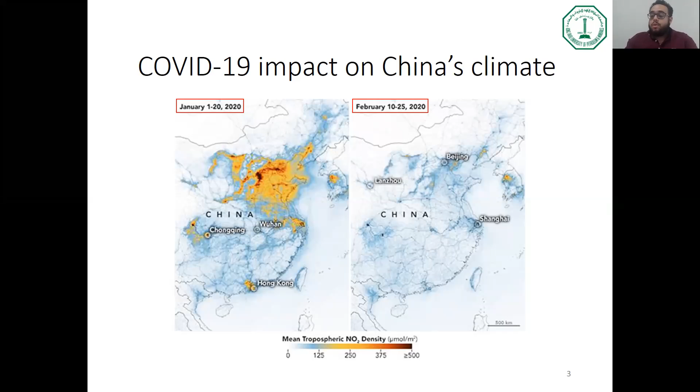If just one month of an effect did such a huge and significant positive impact on the climate, environmentalists would argue that the solution to save our environment from the global warming disaster is basically to use renewable energy.

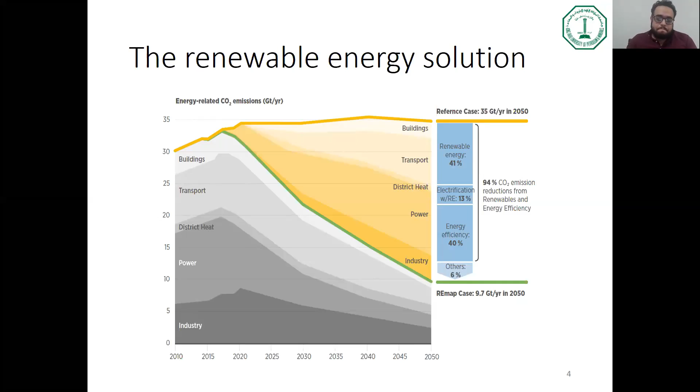So basically we can replace around 25 gigatons per year of CO2 just by converting everything to renewable energy, which is good and correct, no doubt. The problem is that energy transitions always require a lot of investment and a lot of money.

So it's way easier to just go with the oil flow. It's very easy to give statistics about how fossil fuels are horrible and how they damage the environment, and that we need to act against that, and everyone knows this. The problem is that our financial budgets are different than our environmental budgets.

We know that we need to act in 20 to 30 years to solve the global warming problem. The problem is we don't have the money needed, or no one is motivated to invest billions and billions of dollars in just a few years to save the environment. This is not enough business motivation, unfortunately.

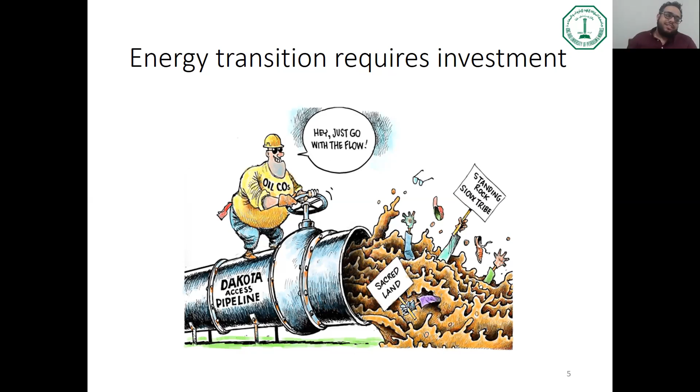So a lot of countries would just prefer going with the flow and keeping things as they are. CO2 emissions is not a good motivation, unfortunately. So how about we look at the problem from a different perspective? Maybe that would provide another motivation for people to act immediately and start the transition to renewable energy.

Let's take the case of Saudi Arabia, and consider the case of Aramco. Interestingly, Aramco published last year, for the sake of their IPO project, an approximation of Saudi Arabia's oil reserves. In their official IPO report, they reported the oil reserves and the biggest oil fields in Saudi Arabia, including Ghawar, which is the biggest onshore oil field, Khurais, Shaiba, and others.

So basically, when Aramco summed up their approximate oil reserves, they found out that Saudi Arabia has around 256 billion barrels of oil reserved under the ground in total.

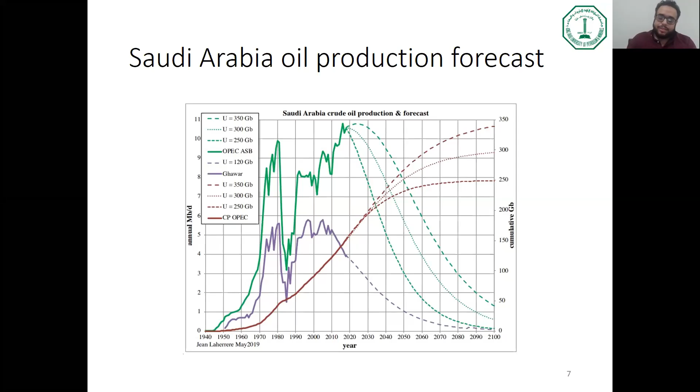COVID-19 actually taught us a very basic but important lesson in economics. You remember in April and March, the West Texas Intermediate oil price went down to around minus $40 per barrel. This means that you buy a barrel and the company will give you $40 above that, for free, just to remove this crude oil barrel. No one wanted this crude oil barrel, okay? The price sunk down to minus $40.

What this tells us is that it doesn't matter how much crude oil you have reserved if there was no demand. Supply makes sense and is important only if there is demand. If there is no demand, then your supply is useless, worthless actually.

Based on this, let's look at how the oil and energy demand will be in the coming 10 years, which is nothing in a nation's history.

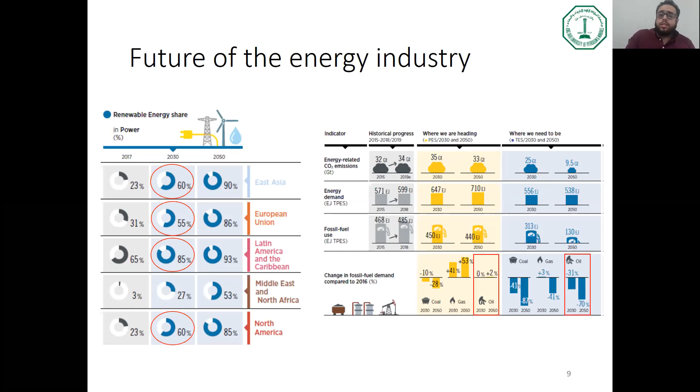And this is actually partly why the government in Saudi Arabia decided to start up NEOM. The whole idea about NEOM, or part of NEOM's idea, is basically to build a 100% renewable energy system that would produce green hydrogen. We'll discuss later what green hydrogen would do for you. Basically, the term green hydrogen means that this hydrogen is produced from renewable energy, so you would use renewable energy to power and electrify your cities and industry, as well as to produce hydrogen.

Not only that, already 3 years ago, the government, as part of Vision 2030, started up what's called the National Renewable Energy Program. Its role is to oversee all renewable energy projects in Saudi Arabia, and its main goal is to produce 10% of the kingdom's energy consumption through renewable energy in 10 years. So 10% in 10 years.

This includes several projects that already started and will start, like Al Khafji Solar Desalination Power Plant, the largest solar desalination power plant in the world. Skaka Solar Power Plant in Al Jawf is already operating and produces 300 megawatts of electricity from solar. Domat Al Jandal Wind Farm will start in 2022, surprisingly funded by Saudi Aramco, and it will produce 400 megawatts of renewable energy.

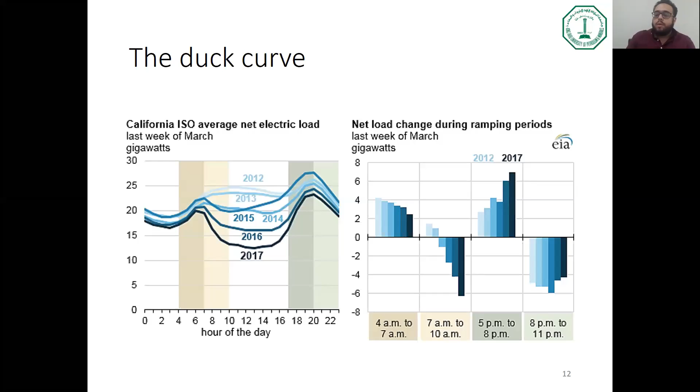So if such a problem happens when we use renewable energy, what do we do? The solution to this problem is to use what's called energy storage.

The concept behind energy storage is simple: you store your excess energy at night, when everyone is sleeping and no one is using a lot of electricity, in some form. Then in the late afternoon or early night, when the demand for natural gas jumps, you release whatever energy you stored. We're not talking yet about how to store energy, just saying that if such a technology exists, it would be very helpful to solve the duck curve problem, which will always happen whether you are in California or in Saudi Arabia.

So you store the excess electricity at night, late at night when everyone's sleeping, and you release it early at Maghrib, early night, when the demand for natural gas jumps rapidly. This is the idea of energy storage.

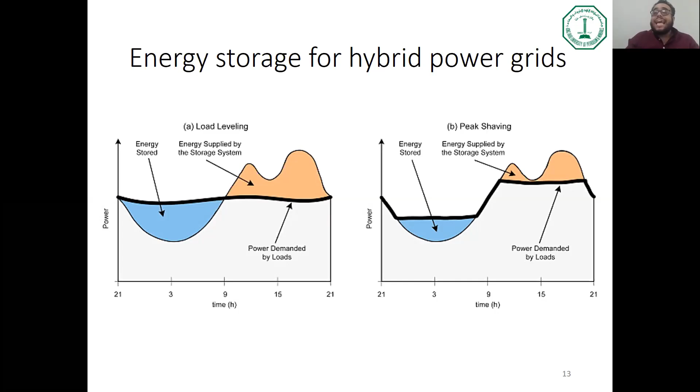What we are hoping for after installing solar panels and energy storage technologies, and integrating this with our natural gas main grid, is to reach something called a smart hybrid power grid. In your smart grid, you would depend big time on renewable energy resources like wind energy, solar energy, nuclear energy, and so on, in addition to your energy storage technology.

All of that would be connected through a smart, artificially intelligent system that depends on the Internet of Things. That central intelligent system would predict how much demand there is for power and electricity across the day, using smart meters found in our smart homes, smart buildings, and smart industries, which send data to the center saying, today we need 30 megawatts of electricity.

That artificially intelligent center would transmit this data back to our renewable energy power plants, so they would produce as much electricity as needed and send it back to you. It's really a two-way dialogue system where you tell us how much electricity you need, and we also predict how much you'll need based on your history.

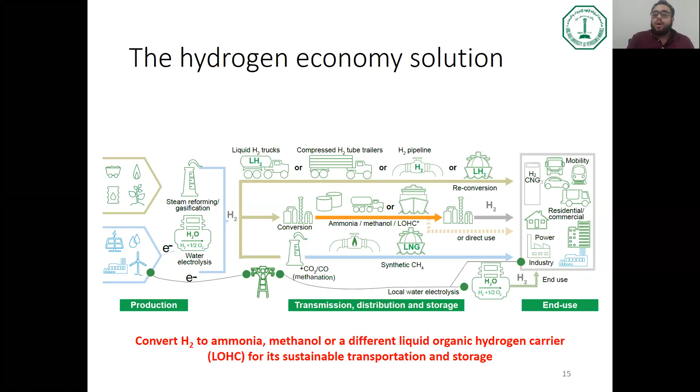So now you would wonder, how expensive is it to produce hydrogen from renewable energy? Actually, if you would have asked me this question 5 years ago, I would have told you extremely expensive. Only 5 years ago, the cost of producing hydrogen from renewable energy was around 9 to 10 euros per kilogram of hydrogen. This is extremely expensive.

Just in 5 years, the cost of producing hydrogen dropped by 45%. The expectation is that by 2030, the cost of hydrogen production will drop by another 50%. So really, by 2030 it's going to be around 2 euros per kilogram of hydrogen, and this is so cheap. So with time, it wouldn't be that expensive actually to produce hydrogen from renewable energy. So this is one good point.

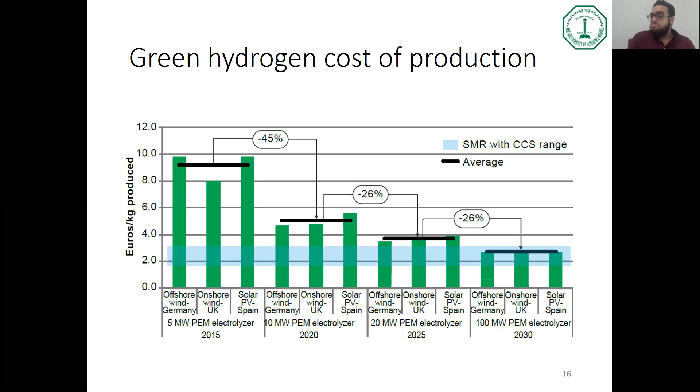The other good point about hydrogen is that you can use hydrogen for CO2 conversion. We are talking about global warming and CO2 emissions and how bad they are. Everyone talks about CO2 capture, but there's very little talk about after we capture the CO2, what will we do with it? Let's say the oil price is so low that we don't care about enhanced oil recovery anymore. What to do with this CO2?

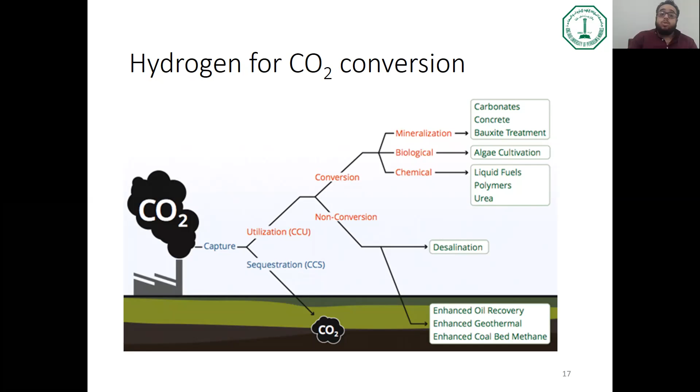Actually, the best thing to do, and the easiest, is to react hydrogen with CO2 to produce chemicals. So you can react hydrogen with CO2 to produce methane, you can produce methanol, you can produce urea. If you reacted CO2 with ammonia, it can be used as a feedstock for polymers, and so on. So really, hydrogen is not only a good energy storage material, not only used for power generation, it's also a good chemical to convert CO2 into useful products. And this is one way to save the atmosphere and fight global warming.

Hydrogen is a very important feedstock for ammonia production, which is the chemical most produced in the world, and for producing methanol, which is the second most produced chemical in the world. So these two, ammonia and methanol, are both produced from hydrogen, and both are sold in millions of tons per year.

And you can see that the expectation is that the production of ammonia will steadily increase in the next 30 years, as well as methanol. So there is demand for ammonia and methanol, there is demand for hydrogen, so why not use hydrogen? It is good for the business.

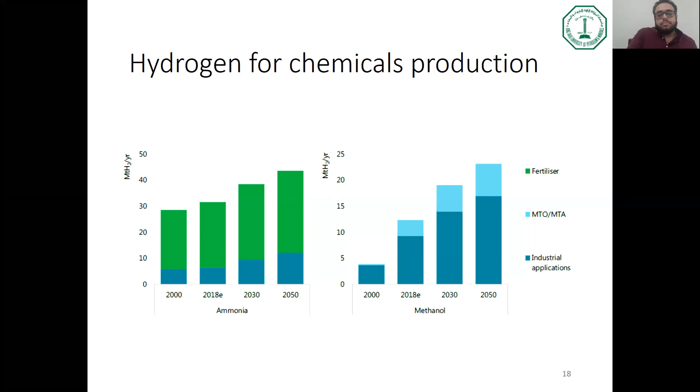And actually, this is what people in NEOM thought about. So the whole idea about NEOM energy is to use renewable energy, wind and solar, to produce green hydrogen, use this hydrogen to produce ammonia, export part of the ammonia to Asia or Europe, and then the remaining part would be transported to cities like Riyadh or Jeddah or wherever.

And in the cities, ammonia would be reconverted back into hydrogen and used for transportation. And this is what we call hydrogen mobility. So now, what does hydrogen mobility mean?

Hydrogen mobility works as follows: you pump hydrogen into your car, and it recombines with air coming in from the atmosphere as the car moves. Hydrogen and air are combined in the hydrogen fuel cell, which produces electricity that runs your electric motor, and your car moves. It's a very easy and simple concept, actually, and this is why it's called a fuel cell electric vehicle.

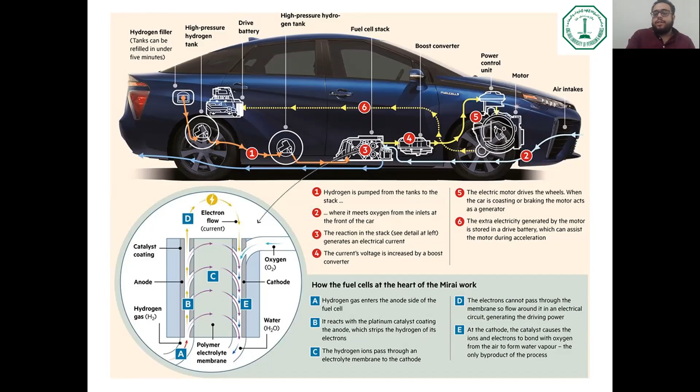So what is a fuel cell? You can think of a fuel cell as a small factory or power plant that produces electric power, except instead of burning hydrogen to produce steam, we don't do this - it's a highly exothermic reaction. If you did this in your car, it would blow up in seconds. Hydrogen is extremely flammable.

Instead, what a fuel cell does safely is break down hydrogen into 2 protons and 2 electrons, which then react with oxygen to produce water. Splitting the combustion reaction into two halves, which is what a fuel cell does, generates electric power, and it's less exothermic, safer, and more efficient.

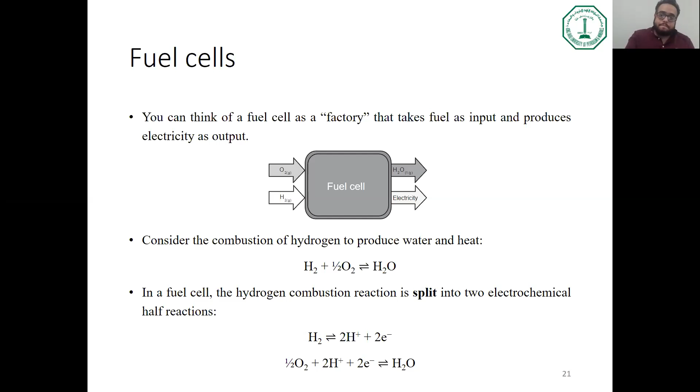A typical fuel cell looks something like this: you have an anode and a cathode. At the anode you inject hydrogen, at the cathode you inject oxygen, and these electrodes are coated with platinum catalyst, which is super expensive. That platinum catalyst dissociates the hydrogen into 2 protons and 2 electrons.

The protons pass through what's called an electrolyte to reach the cathode, while the electrons pass through the electric circuit - this is how we generate electricity. The electricity generated through the flow of electrons powers our electric motor, and everything combines at the cathode to produce water. It's actually a very simple process.

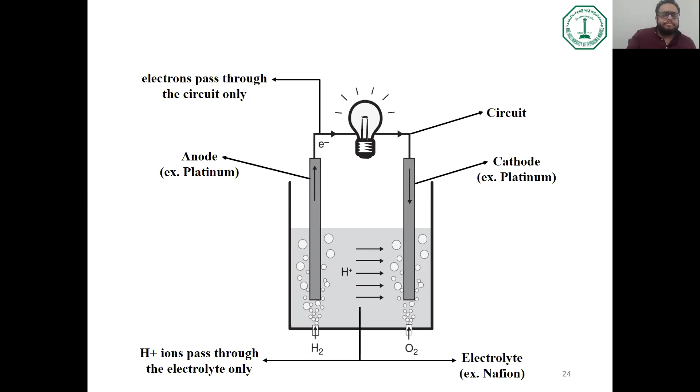The main difference between fuel cells, solar cells, and batteries is that solar cells and fuel cells are what's called an open system. You feed them with fuel - for solar cells the fuel is sunlight, for fuel cells the fuel is hydrogen - and as long as you provide them with fuel, they will produce electricity.

A battery is different - it's a closed system. You first charge your battery, and then you use that battery to generate electricity. So this is more of a closed system. A battery will not work if there was no charge initially stored in it.

Let's move to another point. We talked about hydrogen, its importance, how it's critical for renewable energy and smart grids, what NEOM wants to do, and we explained fuel cells and how fuel cell cars work. But what would immediately come to your mind is how fuel cell electric vehicles compare to battery electric vehicles, something like Tesla.

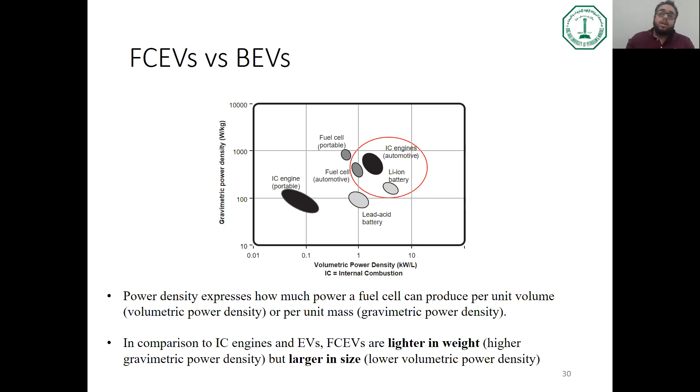Okay, so this is the difference: fuel cell cars are lighter, battery cars are smaller and more compact. This is why battery electric vehicles are very good for sedan cars—sedans are small, so a battery works well. Fuel cell electric vehicles are good for big cars, buses, SUVs, trucks, and so on—anything with a lot of space, because they require space, but they are light.

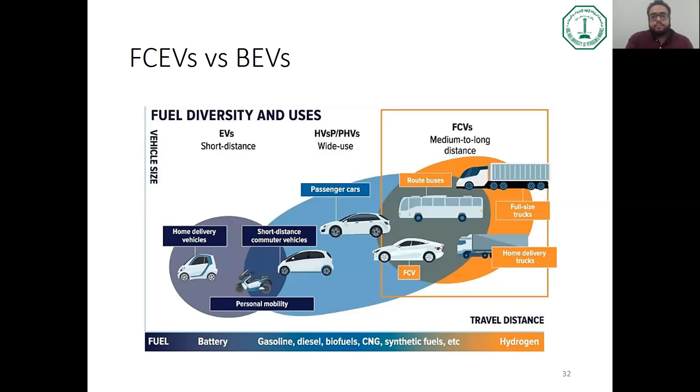You can see that the Tesla Model 3 is not just cheaper, it's cheaper at around 40,000, while the Toyota Mirai is around 60,000. The Tesla Model 3 is also better in performance: with the Model 3 you can have up to around 220 horsepower, equivalent to a Mercedes-Benz C-Class, while the Toyota Mirai produces around 140 to 150 horsepower, equivalent to a Corolla.

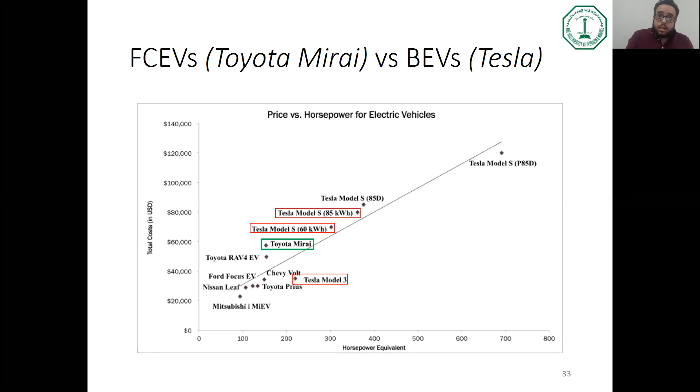So fuel cell electric vehicles, in conclusion, are good for long distance travel, and they are good for big cars like buses, trucks, and so on.

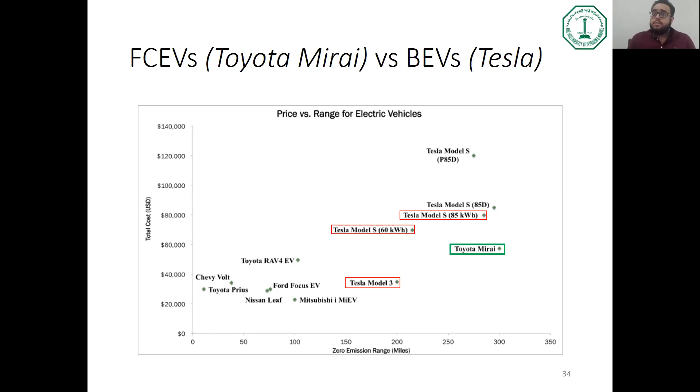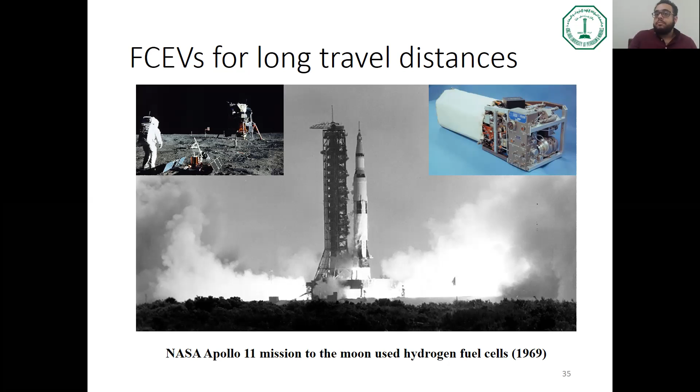Another application of hydrogen fuel cells for long distances is submarines. This is a Type 212 submarine operated by both the German and Italian Navy, and it runs on fuel cells since they can cross long distances without needing to recharge. Submarines can usually stay up to 2 to 3 months in the sea—then you cannot use a battery, and a fuel cell is a perfect match for that.

This is Boeing's fuel cell demonstrator airplane, developed in 2008 just for demonstration, and it flew. So you can run airplanes, or at least a secondary auxiliary power generation system in an airplane, based on fuel cells—your gas turbines provide the power to take off and land, while during cruising you can use fuel cells to provide the electricity needed by the airplane. That's what Boeing demonstrated.

Finally, maybe you all heard about Nikola—it's going to be the first ever hydrogen fuel cell truck to be produced, in collaboration with General Motors, the famous US company. US Express Postal Services already signed a contract with Nikola to provide them with hydrogen fuel cell trucks to deliver and transport mail between cities in the US, since these trucks cross hundreds of miles every day between cities and states. Fuel cells would be a perfect match for such an application.

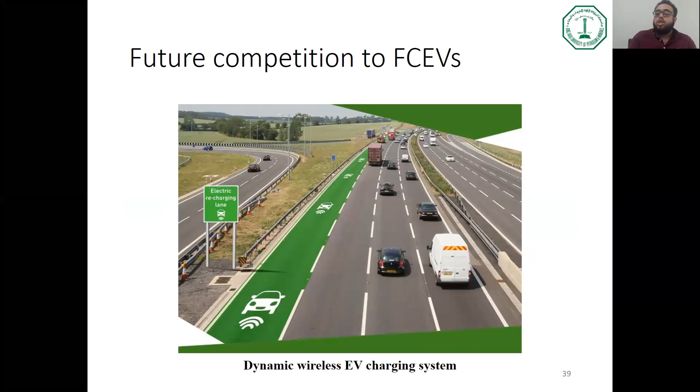The first challenge is what's called dynamic wireless electric vehicle charging system. What's going on here is that you have a battery car like Tesla, and as it moves, there would be electric coils under the asphalt that would electromagnetically charge your battery car as it moves dynamically, so no need to stop and charge.

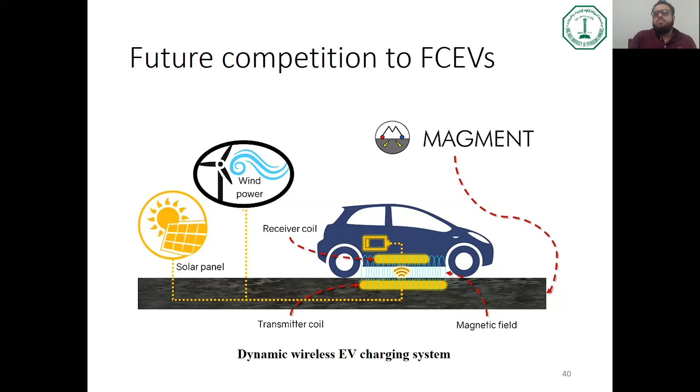Paris and London already tried this technology for a 100-meter lane on the highway, and it worked well. So currently there are new technologies for charging batteries fast and dynamically. If such technology succeeds, then for fuel cell electric vehicles, at least for sedan cars, it's going to be a game changer. They won't be profitable anymore, everyone will just go with a Tesla.

Another thing, a Tesla requires a villa. Since you need to charge your Tesla, you need to have a private garage to charge it in. If you live in an apartment and don't have a private parking or garage, you cannot have an electric car.

On the other hand, charging battery cars takes a lot of time. With the standard charging system, which about 95% of Tesla owners use, it takes around 6 hours to charge from 10 to 90%, while with the supercharger it takes between 30 to 170 minutes. But the problem is that superchargers don't exist a lot around the world, so there's a big shortage of them.

Due to all these reasons, Aramco started its hydrogen initiative. Air Products built its first hydrogen plant in Jazan. Air Liquide built 3 hydrogen plants in Yanbu. KFUPM started its first hydrogen fuel station in DTV, I hope you all know this. And we started our renewable energy concentration as well as our hydrogen mobility concentration at KFUPM.

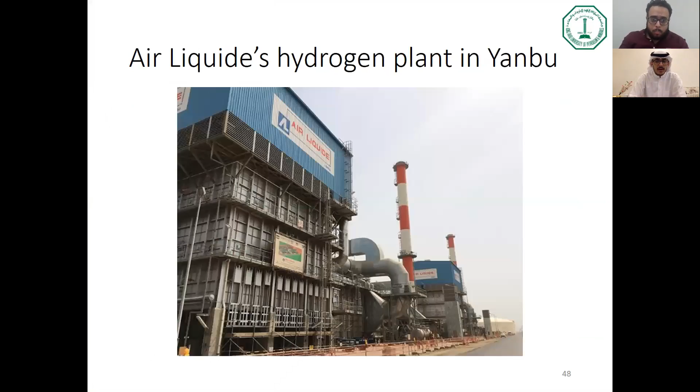Okay, thank you, Doctor. Muhammad Abdel Jabbar is asking: from one of the slides, we saw that all renewable energy projects in Saudi Arabia are solar-based. Isn't there other efficient options here?

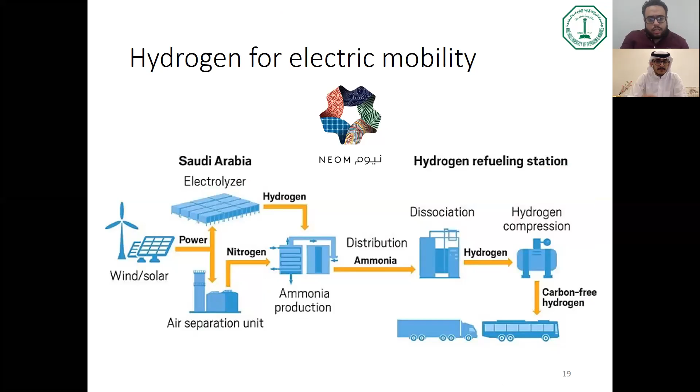No, actually, there was the Dumat Al Jandal wind farm. It is a wind farm, and it's a pretty big wind farm. And there is already NEOM, which depends on hydrogen. The main thing is not a problem. Saudi Arabia is one of the top 10 countries in the world with solar potential. I think it's ranked as the 6th best country in the world with potential for solar energy. So it makes sense that solar energy is dominant, but still wind farms are being built, as well as hydrogen with it for energy storage.

Geothermal, again, there is an interest, but there is a lack of knowledge. So once we know more about Saudi Arabia's geothermal potential, I believe the government will start working on digging up some of these geothermal wells and using them.

Yeah. Okay, thank you, Doctor. There is one question from Abdurrahman Qadir. He's asking, can you please mention the differences between renewable energy and hydrogen mobility concentration programs in KFUPM?

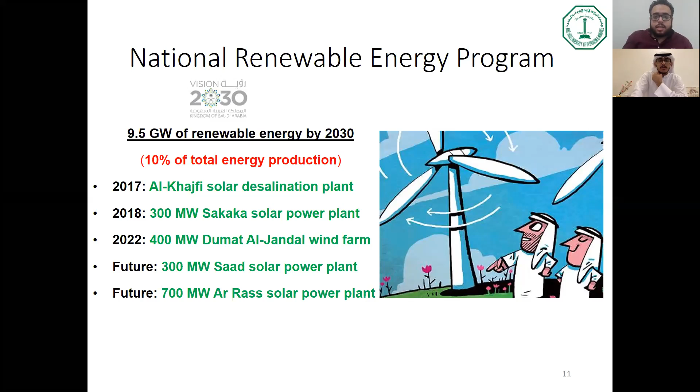Yeah, this is actually a good point. So basically, I hope that many of you recognize from the presentation that renewable energy and hydrogen mobility are very much connected to each other. You cannot have an efficient renewable energy system without hydrogen, and you cannot produce hydrogen in an environmentally friendly way without renewable energy. So they are very connected, and I really understand why both concentrations might be a little bit confusing.

In the renewable energy concentration, we concentrate more on the power generation aspect of renewable energy. So we take courses on renewable energy, more into producing power from renewable energy, a course on fuel cells for energy storage of renewable energy, a solar energy course where you study concentrated solar panels to use sunlight to heat fluids, and you take economics, energy economics.

While in the hydrogen concentration, we concentrate more on what hydrogen does and not on power generation. So you take how to produce hydrogen from renewable energy. You don't go deep into the renewable energy technology, you just deal with renewable energy as a tool, so we don't go deep there. We only care about the processes. We take a little bit of renewable, but not that much.